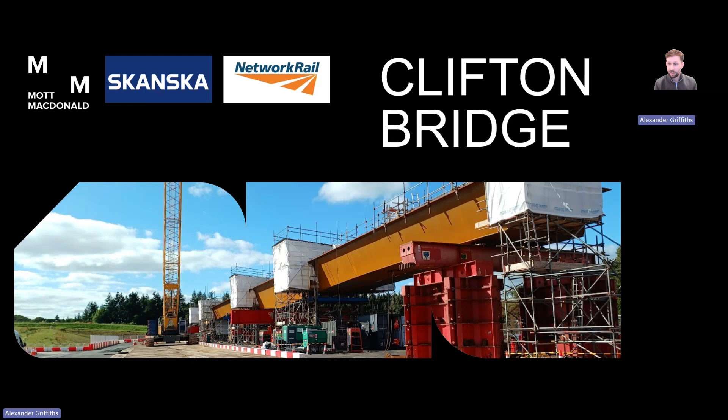I'm a principal bridge engineer at Mott MacDonald, and I'm here today to talk through the design and analysis of Clifton Bridge. So this is a project that's being delivered by Skanska for Network Rail, and Mott MacDonald are employed by Skanska as the permanent works designer. The CAT-3 check was done by Tony Gee and Partners, and Bramble have been involved in the assessment of the existing structure.

So I'll give you a bit of an overview of the project and then talk you through the main stages of analysis and design, from concept through outline, detailed design, drawing out some of the key analysis decisions we've made, some more detailed bits of analysis we've done, which have hopefully added a bit of value to the project.

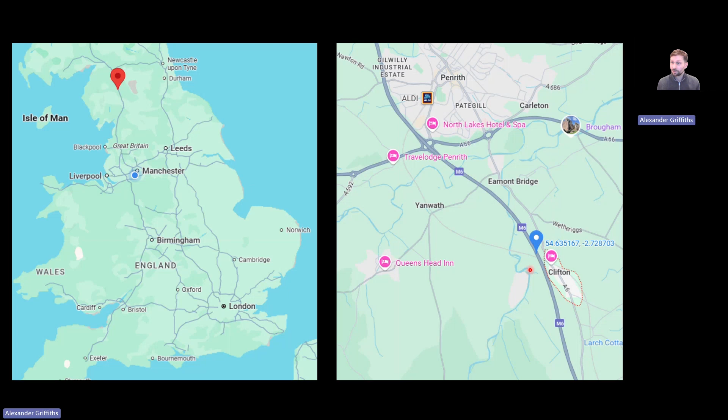So a little bit of context. Clifton Bridge is based up in the northwest of the UK, up here. It's just to the south of Penrith, next to a little village called Clifton, which is the namesake for the bridge. The bridge carries the West Coast main line over the M6 motorway, so it forms the intersection between two key transport corridors in the northwest, and any construction works in the area will involve closing both of these transport corridors, causing significant disruption.

So currently, there is a bridge there at the minute. It's a post-tensioned concrete box girder bridge that was built in the late 60s. Looks in good condition in this photo, but inside the post-tensioning tendons are severely corroded and deteriorating. There's currently a traffic restriction on top of the bridge, which sort of creates a lot of pressure to get a resolution to this structure.

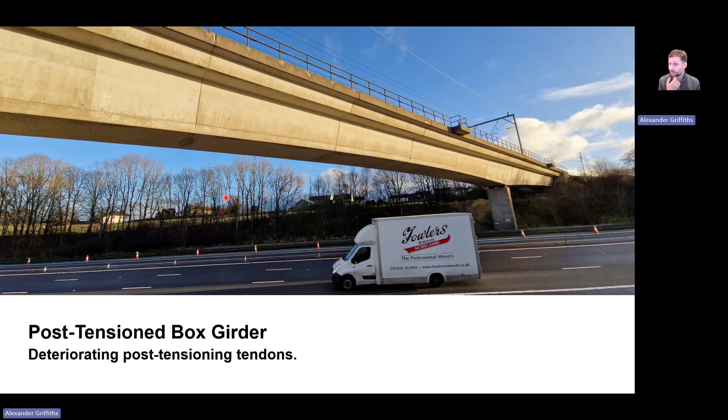And remedial works were extensively investigated by Bramble, but eventually all of these were exhausted due to the required time to close the West Coast main line and the disruption to services on the line.

So we got involved in the project at the start of 2024, at which time the blockade for the installation of the works was already booked in for about 2 years later, in January 2026. So we've got a 2-year programme from the start of concept design all the way through detailed design, construction, and bringing it into service, which is a very ambitious timeline for the project.

We had a couple of months doing optioneering work and a couple of months to develop our AIP, our outline design. Both of these stages were actually done supporting a different contractor, Story Contracting. And there was a little bit of a break in the design work when Skanska took over the project, and this time just allowed for the contracts to be sorted.

So the overall design programme is about a year, but you'll notice here that the fabrication starts in January 2025, which meant that we had about 4 or 5 months to complete the design of the superstructure and have it all CAT-3 checked and get all the details sorted so that the fabrication could start in January 2025. This was a very tight programme. And then following on from that, not long after, the precast deck units needed to be fabricated, and then again, not long after that, construction works on site started.

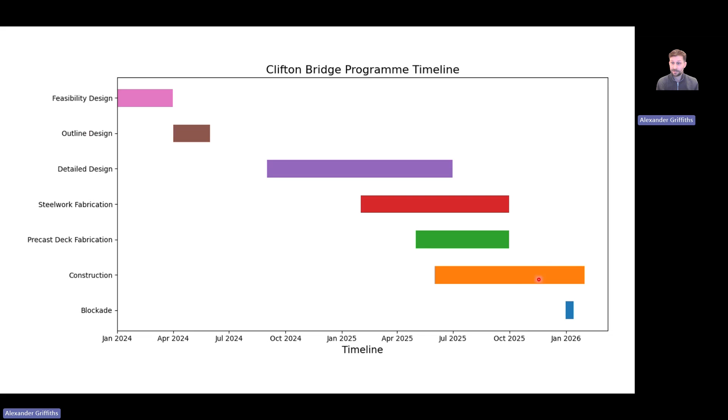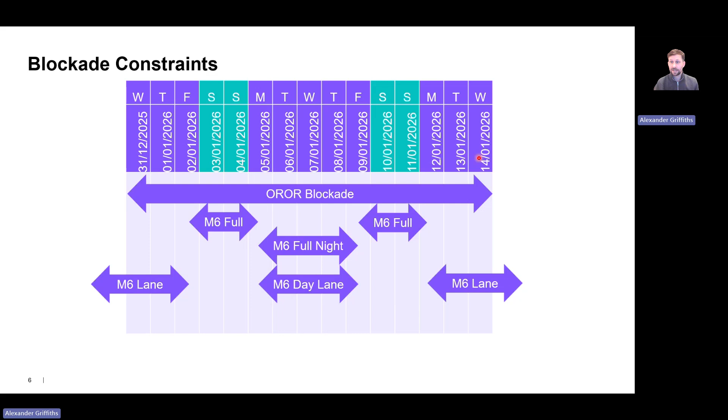So I'll just give a little bit of an overview of the blockade timeline. It's a 14-day blockade of the West Coast main line. We've got about 3 days at the start for preparation works. Then you've got full closure of the M6, which allows the existing bridge to be demolished. You've then got about 4 days when the M6 is reopened, while we're doing preparations and final modifications to the substructure before the new deck is installed on the second weekend, where you've got full M6 closure. And then you've got 2 or 3 days at the end to install the track and hand back.

So concept design, two options were developed at the concept design stage. The one on the left is a single span truss on brand new substructures. The idea was to install these in between the abutments and piers of the existing structure, and this meant that all the substructure works could be done outside the blockade. It also means you've got brand new substructure as well, which is potentially more valuable.

However, this is clearly quite visually intrusive, and there were significant concerns about the feasibility of getting this through planning, and if planning wasn't approved, what the knock-on implications would be for the already pre-booked blockade. So our second or alternative option was to do something that matched very closely to the existing structure.

A steel composite box girder bridge supported on the existing substructure in a 3-span arrangement. This is more challenging from an engineering perspective, as you've got to try and demonstrate that the substructure is adequate for the new superstructure. And it also meant that some modifications to the substructure are required during the blockade work. But generally, as a whole, the project team agreed that this was the lower risk and better option to take forward.

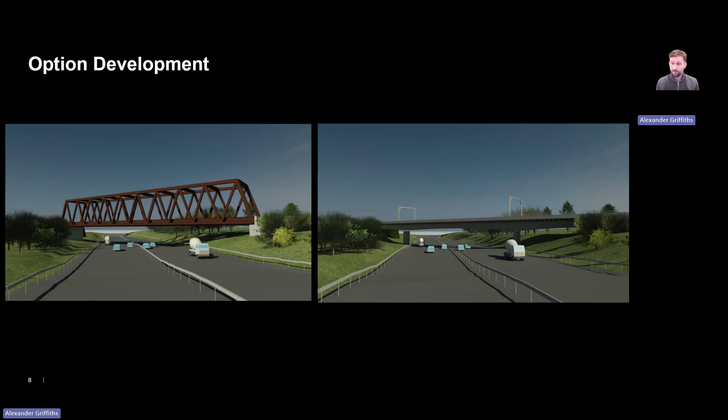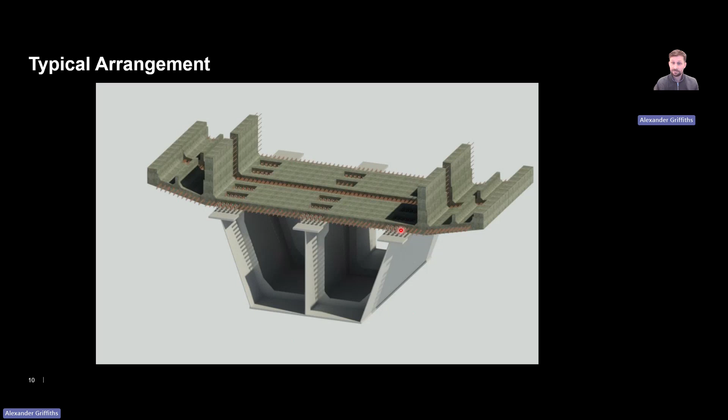We needed to introduce this central web here to comply with the track twist checks. Without this here, there's too much sagging of this deck slab, and we couldn't get the track twist criteria to be met.

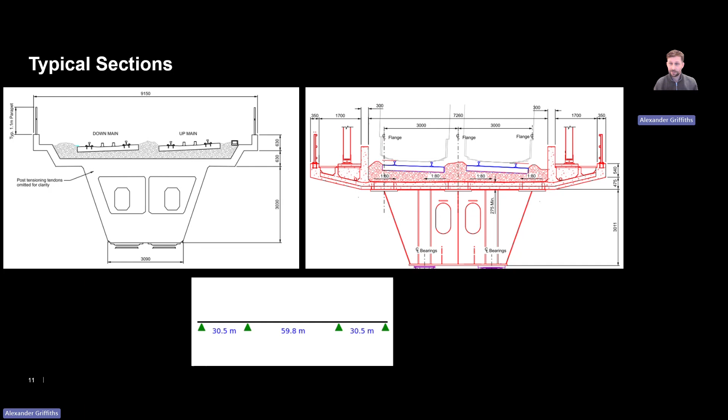Okay, so our workflow for, I suppose, design and analysis. We built a sort of geometric model in Grasshopper. One of the main reasons for doing this is that the geometry of the box girder is quite complicated. And we wanted to make sure that our webs could be fabricated from flat plates and didn't need any warped plates, which would delay fabrication and cause issues in meeting the programme for the blockade. So there's a lot of constraints for the webs. We needed them to be a fixed width at the top, so that the positions of the pockets and reinforcement for the deck slabs could be consistent as well.

But because it's trapezoidal, they're sloped in at 20 degrees, and there's also a haunching of the superstructure soffit, so it's haunched, and there's also a very slight precamber to the top chord as well. So a lot of interconnecting things going on there, and we just needed to work through and convince ourselves that it could be fabricated out of flat plates, and Grasshopper and Rhino were really helpful in doing that.

Another reason for wanting to do this is it means I can be a little bit closer to the geometry. With the very advanced BIM software that projects rely on these days, I sometimes feel a little bit removed from the geometry, and I felt a little bit more in control with this. Once we'd developed that geometry in Rhino, we were able to bring it into MIDAS using the Civil NX Grasshopper plugin. At the time, it was quite early stages for that plugin, so there were some teething troubles with applying patch loads. I think these have now been resolved.

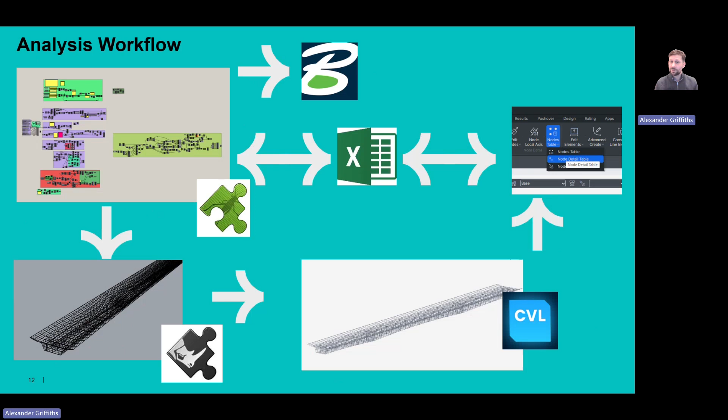We also created the start of our BIM model from Grasshopper. As we got further down the line in the design progress, this tie was severed, but it gave us a good head start in creating the geometry for the BIM model.

So there's a couple of action effects in box girders that you don't always come across when you're doing sort of typical deck slab design, and they're both related to torsion. The first one is warping, and the second one is distortion. And neither of these are included in the Bernoulli beam formulation. So if you're using beam elements in an analysis software, these wouldn't be included.

So the first one, the warping, is caused when you get pure torsion. When you get pure torsion in a box girder, you get a shear flow going around the perimeter. And if you cut out a small length of box girder and have a look at one of the flanges, say the top flange or the bottom flange, doesn't matter which, the shear flow in that flange at either end of that short section would be going in opposite directions. And that tends to change the shape of that flange from a rectangle to a parallelogram.

And I suppose if the box is not doubly symmetric, then the sections don't remain plane, and that's not necessarily a problem. It'll warp, and you'll get a slightly different shape. But because we've got very stiff diaphragms above our bearing supports, these act as restraints. So that warping can't happen freely, and you get additional longitudinal stresses in the top and bottom flanges. And these tend to be higher in the corners.

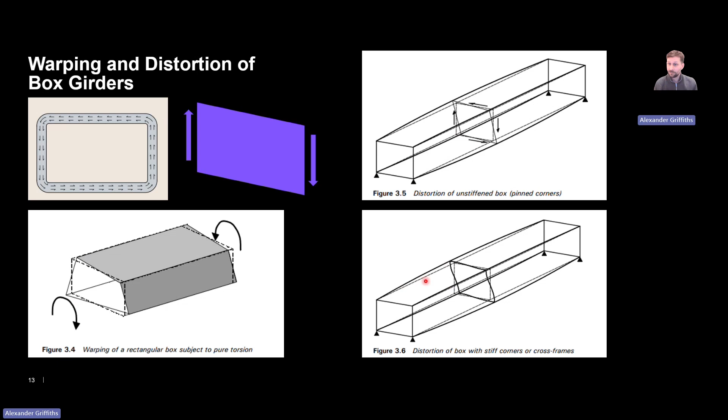And if you've got transverse stiffeners on your webs, which we most likely will have, these will resist that distortion and attract additional load. The stiffeners and the longitudinal welds between the web and the flange need to be designed for this action effect. So the reason for mentioning all that is it informs our approach or strategy for analysing the structure.

So what we've tended to do is use plate elements where these action effects could occur. So those places are basically any of the walls that form the box girders. So the bottom flange, the 2 webs, and the deck slab were all modelled as plate elements, and then everything else, the top flanges, any bracing members, any stiffeners, were all modelled as beam elements, just to avoid overcomplicating. And that means that these distortion and warping effects are implicitly included in the analysis.

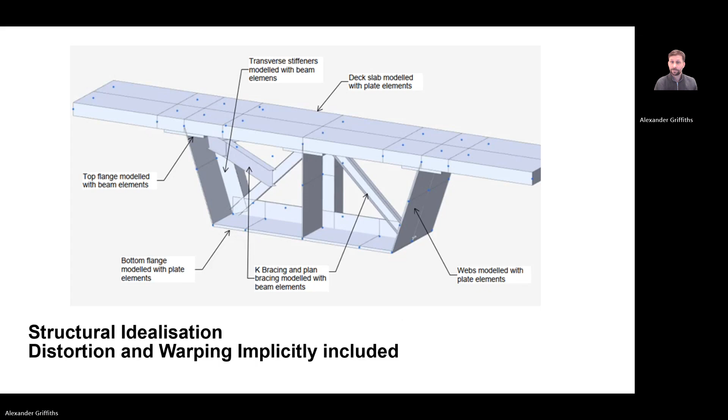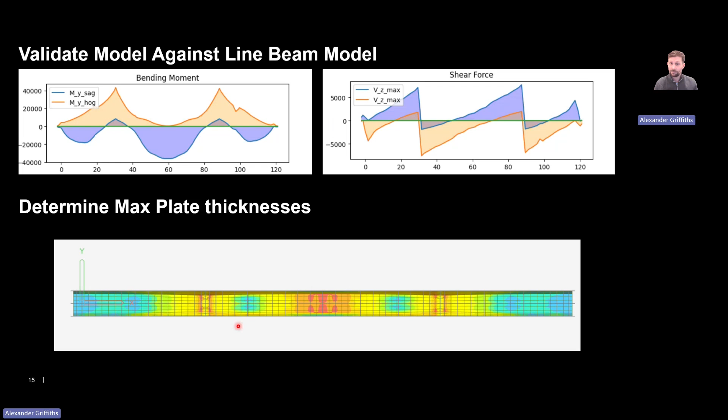So it's quite a sophisticated analysis model, a little bit more sophisticated than a standard grillage model. And it's important when you do a sophisticated model, even more so than any model, that it is validated against something a little bit more simple, a little bit more intuitive. So to validate our model, we created another simple line beam model where we could verify some of the key results and give ourselves confidence that the global model was behaving as expected. Once we were happy with the results, we were able to estimate what our maximum plate thicknesses were for the structure.

Now, as mentioned earlier, we were expecting there might be some issues with uplift at the bearings for this structure, and this was due to the span arrangement, the short side spans, and also the widening of the deck slab at the top, while having the same width of substructure at the bottom. And uplift is generally not permitted on railway bridges in the UK. Now, MIDAS allows you to run moving load analysis very efficiently, so we were able to determine the worst case uplift scenario quite early on in the design process. And you can see here that there's about 2 meganewtons uplift for our worst case.

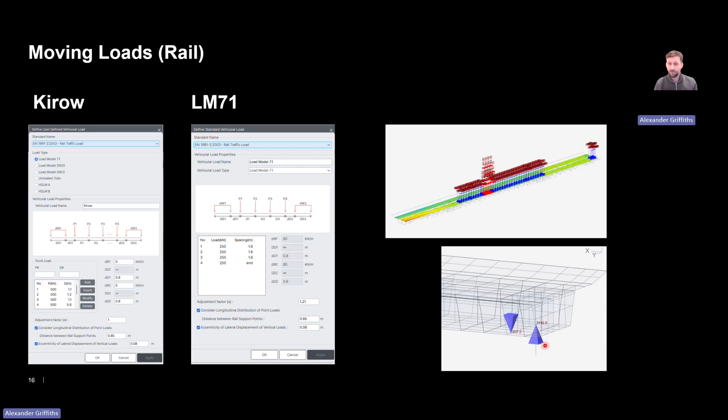So a few key changes we had to make to try and address this issue. The first and most obvious one was to widen the bearing spacing from the 2 meters we had originally, which was obviously very narrow spacing, up to 3 meters. Now that had a knock-on consequence because we now needed to do much more significant modifications to the substructure in order to make those bearings that much wider.

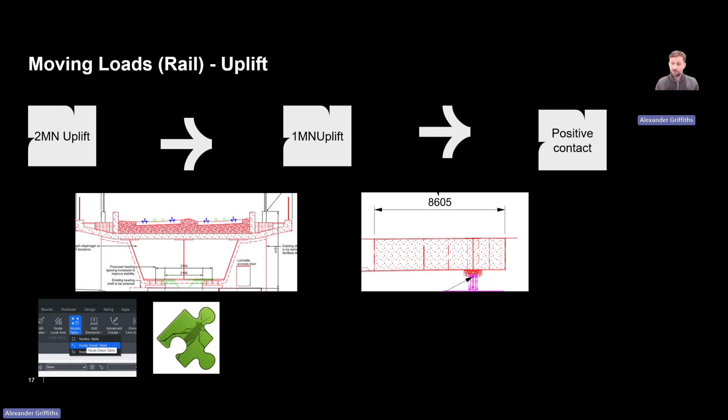Now, it's worth mentioning that our bearing supports are all integrated to our node positions in the analysis model. So we utilised our Grasshopper workflow and the node detail tables in order to make some of these changes. And if the project timeline was a bit more generous, we would have maybe looked for a derogation for the uplift requirements, but we didn't think we'd be able to get one approved within the project timeline, which influenced some of these key decisions.

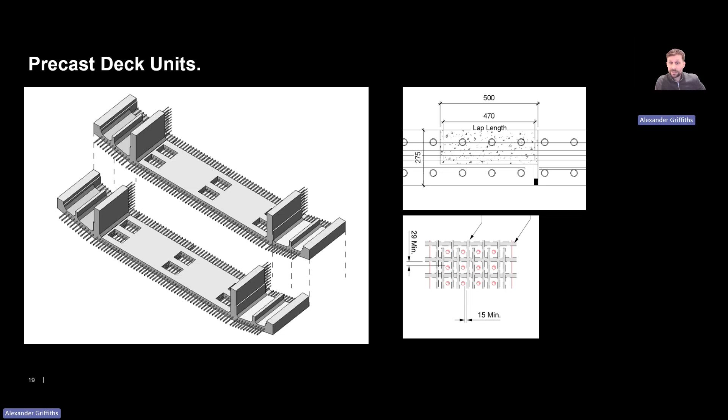Okay, moving on to detailed design and analysis. So I suppose first off, a little bit of a look at these precast deck panels. So these were chosen mainly for their speed of installation. As I've mentioned a few times, the design program was heavily constrained. The construction program is equally, if not more, constrained. And this meant that these could be fabricated off-site while the steelwork was being fabricated as well. And then they can all be brought to site and erected in one go.

So when you're dealing with precast things and getting them to overlay, there's always a lot of concern about tolerance, and we were especially concerned about tolerance on this bridge. You've got a steel box girder underneath this, which is very prone to distortion during welding. Quite heavily reinforced deck panels that all need to be coordinated, overlaid, and lapped, with the reinforcement slotting in between pre-installed shear studs.

So we spent a lot of time looking at tolerances, positional tolerances on the shear studs, positional tolerance on the reinforcement, the likely distortion of the box, lateral and vertical deviations at the top flanges, and any deviation in the soffit of the precast panels. And we needed to get the fabricator and the precaster both to sign up to tolerances that were tighter than those that are permitted in the execution standards.

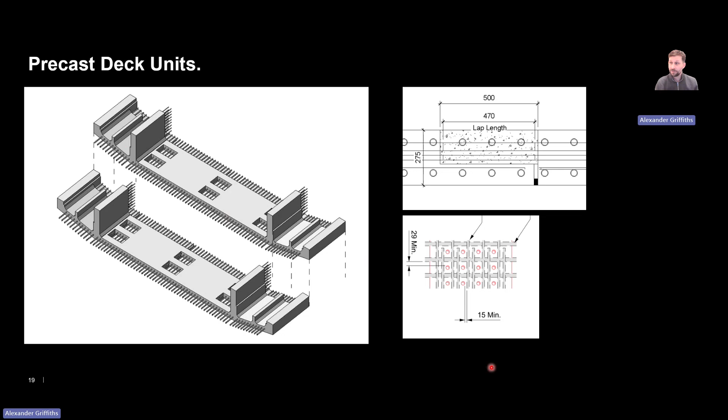So we were looking for a 5mm tolerance on the placement of reinforcement and a 5mm tolerance on the placement of shear studs. And if you do that, we had 15mm tolerance for on-site installation between the shear studs and the reinforcement, which was something we agreed with the contractor that we all felt we could achieve.

That's all very well and good in theory, but you've got steelwork being fabricated in one factory and precast panels being fabricated in another factory, and a lot of effort was made by the contractor in terms of QA and coordination to make sure that everything was done as per the design.

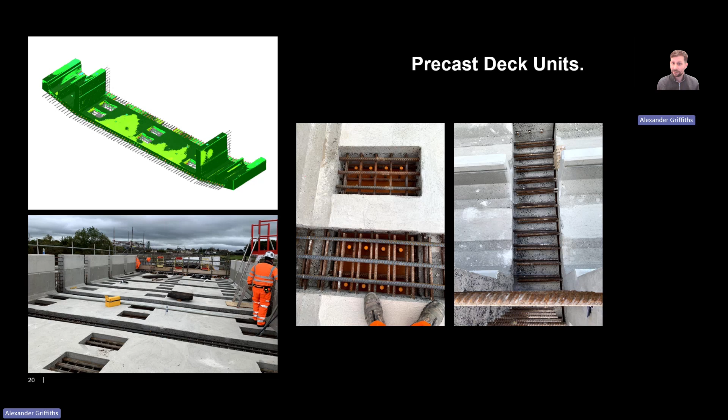Okay, so one of the first things we did when we got onto detailed design was set up our construction stage analysis. Now, our construction stages were developed using a mixture of propped and unpropped stages, and this was to maximise the compression in the slab at mid-span and minimise the tension in the slab and top flanges in the hogging regions over the piers.

So the steelwork's brought to site, landed onto trestles in a sort of fairly regular propping scenario. The steelwork is then welded up, and the mass concrete, the magnetite concrete, is then poured into the ends of the deck. Then the third stage is the first set of concrete units being landed on.

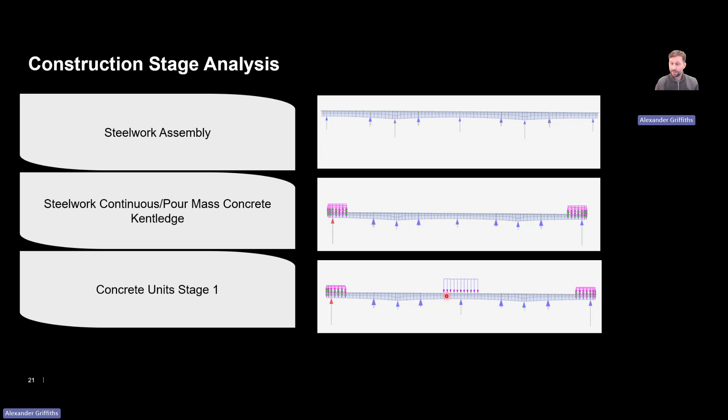And then once they're landed on and the concrete in situ stitches are poured and hardened, we can then activate the stiffness for this section, and the next set of precast panels are landed. And again, once the in situ concrete's hardened, we can activate the stiffness for those. And then so on. And then the last set of panels to be installed is just over the piers here.

And by this point, sorry, I missed out the removal of the propping. After this stage here, the props are removed so that this can sag. And when these last few deck panels are installed, the steelwork is almost pre-bent over the hogging regions so that the slab is taking up minimal tension in the permanent case.

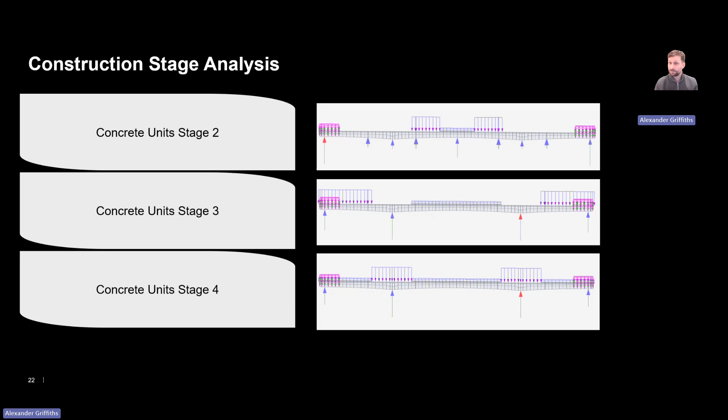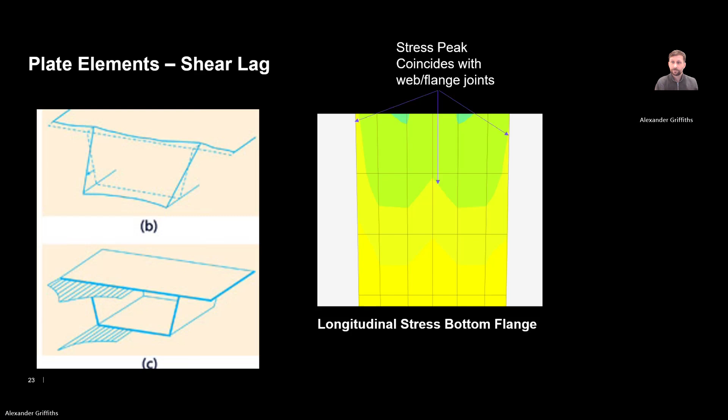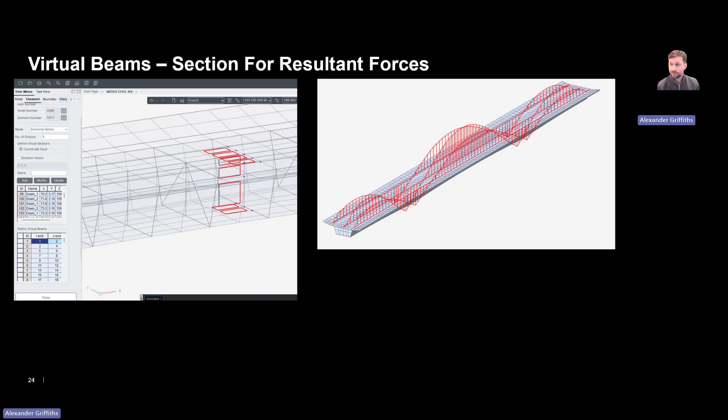So one really nice feature in MIDAS, especially when you're using plate elements, is the virtual beams or section for resultant forces. And what this does is it essentially integrates the stresses over a cross section that you define and gives you the equivalent moments and forces for that virtual member. And it means you can almost design this like you would a grillage model, but you've got the benefits of being able to examine the stresses as well and the distribution of stresses across those cross sections.

And without virtual beams, it would be very hard to design class 4 sections efficiently, and I'll touch on that a little bit at the next stage. And the only way I think to do it would be to limit the stress in the web so that you could achieve a compact section, which was a bit of a trick we used at the early design stage, but it's quite conservative.

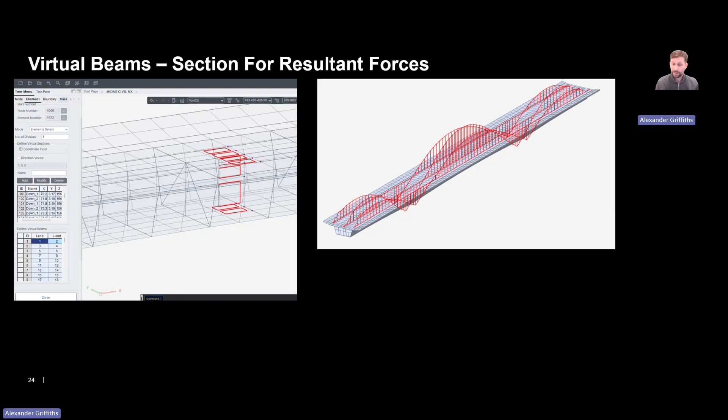The plate buckling. Plate buckling seems very complicated in the Eurocode compared to the old ways of doing it, but essentially you work out a slenderness for your cross section, and from that slenderness you work out a reduction factor. Now our reduction factor based on this was about 0.67, which means we're getting rid of about a third of our web in the compression region.

Now, what you can do is you can then take that cross section, rework out what stresses you get at the extremes of your web, and then work out a new slenderness based on this iterative loop here. Now, it's quite time consuming to do that by hand, but we were able to set up a little Python script just to iterate through that. And it meant that we were able to demonstrate we didn't need to have any reduction in our webs.

And firstly, that's good from a design perspective, because it means you can utilize more of the structure. But it was also really important from a design practicality perspective that, if we'd have had to use reduced sections, we wouldn't have been able to extract the stresses directly from the design model. Everything would have had to be exported based on the virtual beams, and then your stresses recalculated based on these cross sections.

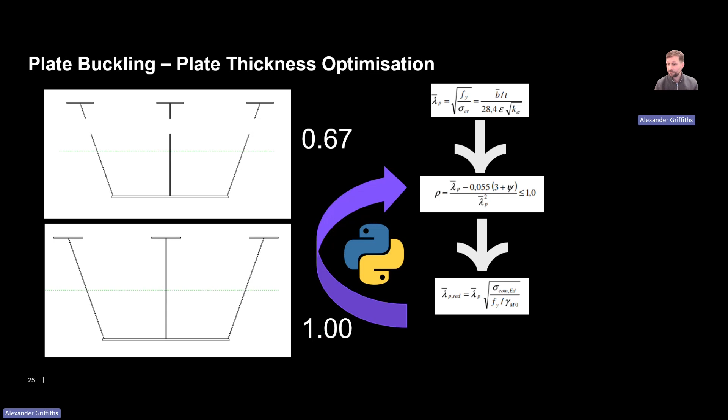But because we were able to demonstrate that no reduction was required, we could then use the stresses directly from the model, and that becomes really important when you move into the fatigue checks, fatigue verification.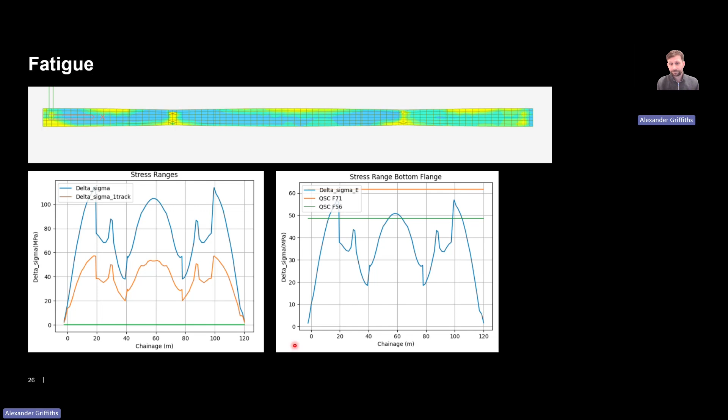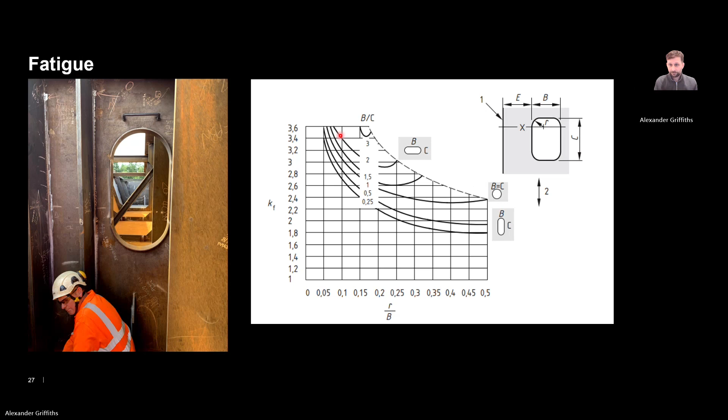Now, because it's a box girder, we needed a number of openings in some of the webs and flanges and diaphragms. And these can cause stress concentrations, especially when you're designing for fatigue. Now, the PD does offer some simple factors that you can use, like a stress range multiplier. But even if you adopt best practice in terms of geometry, the best multiplier you're getting is 1.8. So you're nearly doubling the stress range that you need to verify in the design. And some of these openings were in quite highly stressed areas. So there was just no way we'd be able to accommodate a doubling in the stress range without going to thicker plates. And introducing thicker plates causes more problems in terms of availability and fracture toughness.

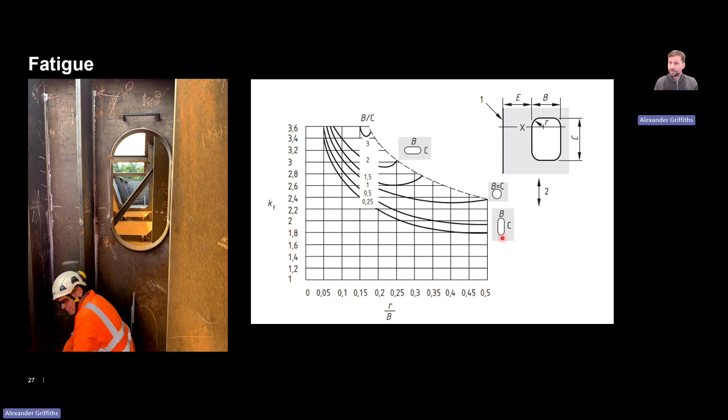So, these multipliers don't consider any additional stiffening that you might do around the opening to alleviate some of this additional stress. So we decided to model these openings explicitly and refine our mesh around these openings and undertake a specific fatigue analysis. And by doing that, we were able to reduce our stress multiplier from, it's probably 100%, down to around 15%. So it was really valuable going through that exercise. And sometimes when you venture out on these decisions, you don't necessarily know whether you're going to yield the results that you want. So sometimes you just have to go down that avenue. It might not have been such a big saving, but we were lucky in this case that it was.

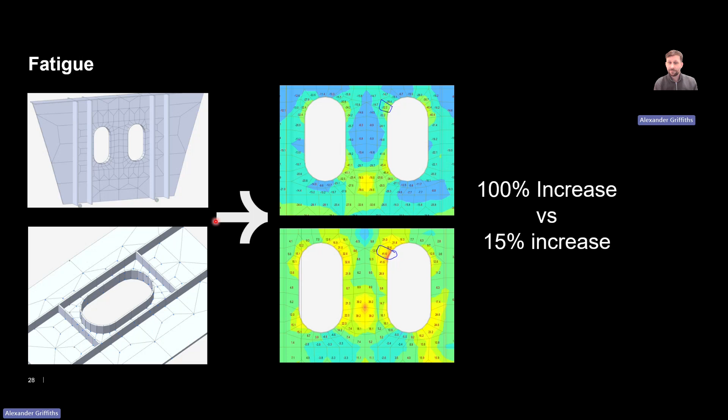So yeah, I mentioned that we wouldn't be able to accommodate thicker plates due to availability. And the other option that's often used is putting double plates on to reduce the stress. But again, double plates have a very low fatigue category, so I don't think it would have been particularly helpful in this scenario.

Okay, so this slide's just talking specifically about how we analysed the diaphragms. So above each of the bearing locations, we've got a full height diaphragm across the whole cross section. Now the PD, I think it's PD 6695 part 2, has some closed form solutions of how to design diaphragms, but they're very restricted in terms of their geometry. And one exclusion is they're not applicable to multi-cell box girders, which we had. So we couldn't use these closed form solutions. So the only option we had really was a non-linear buckling analysis to verify the diaphragms.

And we spent a lot of time thinking about the best way to do this. Typically, if you had a grillage model, you would have your line beam coming in, and then maybe a refined plate model local to your area of interest, and then a beam element coming out. Now, because we had this as a plate model already, what we decided to do was create a couple of dummy nodes within the global model, and then attach rigid links to each of the nodes on that cross section, I think maybe 2 or 3 meters either side of the diaphragm.

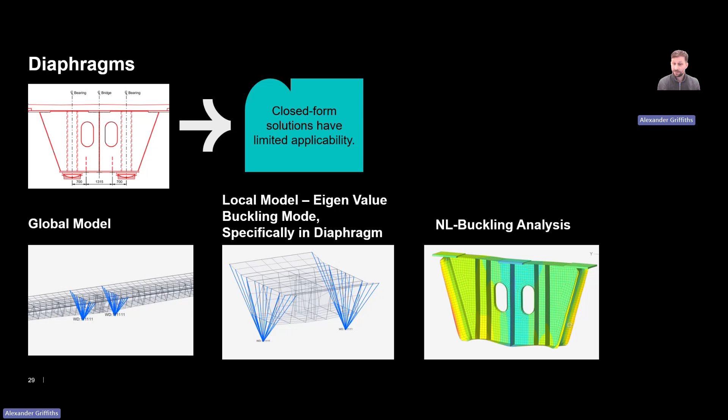Okay, I'll talk a little bit about the installation now. So the bridge is being installed on SPMTs, and SPMTs are not static supports. They work based on hydraulic groupings. So initially, in the early design stages, I think we maybe had 8 support points. But it was felt that there was a high degree of statical indeterminacy, and we wouldn't really know what the reactions were at any one of the SPMTs with any great confidence.

So through collaboration with the contractor and their SPMT supplier, Mammoet, we decided to opt for a 3 support point arrangement. There's still the same number of SPMTs, but it's just a change in the way they're hydraulically grouped. So you've got a hydraulic group for these ones here, a hydraulic group that links these ones here, and then one long hydraulic group along the top here. You can see these groups shown by these wiggly lines. That means you get hypothetical support points here, here, and here, and you've then got a 3-point lift, which is statically determinate.

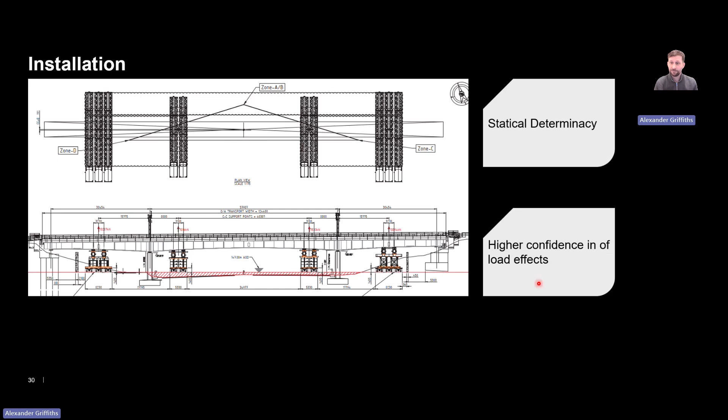Now, maybe I was being a bit slow at the time, but it took me quite a while to figure out how to model these hydraulic groups. But in the end, we just did it through a series of rigid elastic links. The SPMT supplier was able to give me the details of their spreader beams, and I modelled those explicitly with a small beam connecting that to the superstructure.

And then we basically had a series of rigid elastic links that took it to an imaginary support location in between the 2 SPMTs here, in between the 2 SPMTs here, and at the midspan of those 4 SPMTs over here. And then that meant we could model the SPMT lift quite accurately.

Now, the reason we wanted to do this is twofold really. The first one is that with the significant amount of magnetite concrete in the ends here, this is actually one of our critical load cases for the cross section in the side span here. It's very highly utilised just over this outer SPMT, so we needed to model it quite accurately.

And the second reason is that, again, because of this significant amount of mass concrete in here, we're getting almost 100 mil deflection at the ends of the bridge. And we needed to make sure that there was enough stroke within the jacks of the SPMTs that they could come in, lift it off its existing trestles high enough so that it can be transported in over the new bearings and then into position. So we just needed to give everyone that little bit of confidence that there was enough stroke in the jacks and that the deflections could be accommodated.